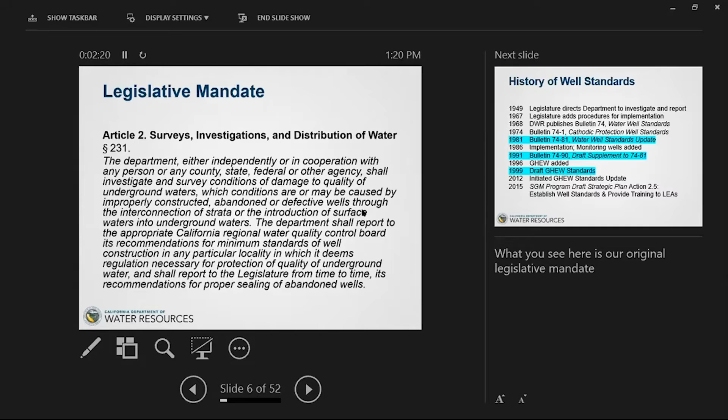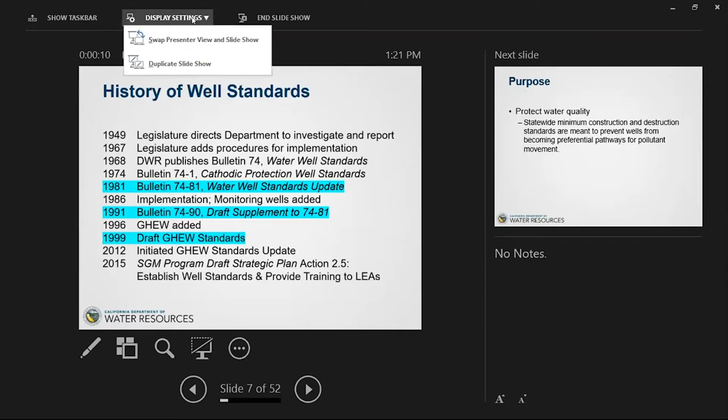Sorry, we're just working on technical stuff with the presentation. It's just showing your presentation notes instead of the slide. All right.

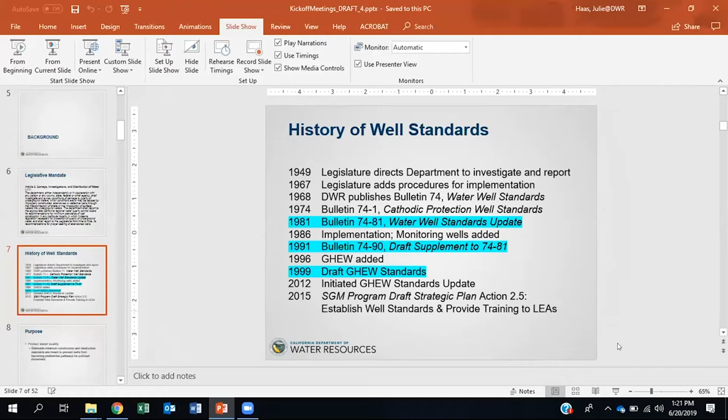Since 1949, the legislature has added several new sections to the code, adding more types of wells and detailing the process for implementing the standards. As highlighted in blue, the current well standards that are in use today were published in 1981, 1991, and the draft geothermal heat exchange well standards were published in 1999.

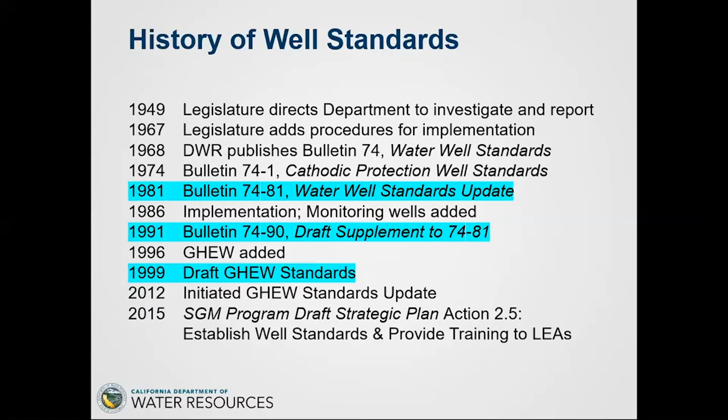Getting to our purpose: from our legislation, or from the water code, we get our purpose, which is simple: protect water quality. So statewide minimum construction and destruction standards are meant to prevent wells from becoming preferential pathways for pollutant movement.

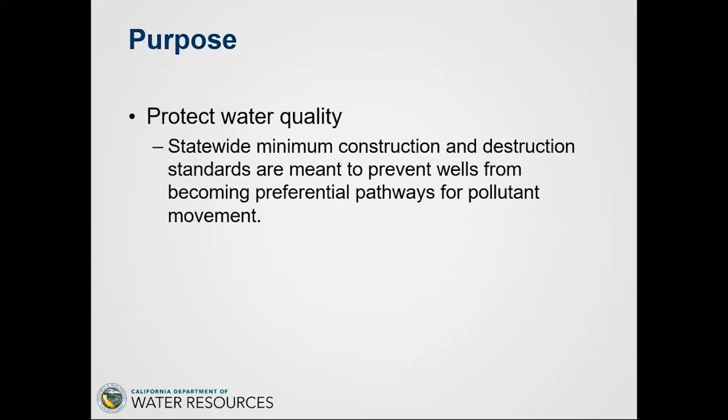And we also get our scope from the water code. The water code mandates minimum statewide standards for construction, maintenance, abandonment, and destruction of four types of wells. Those are water wells, monitoring wells, cathodic protection wells, and geothermal heat exchange wells.

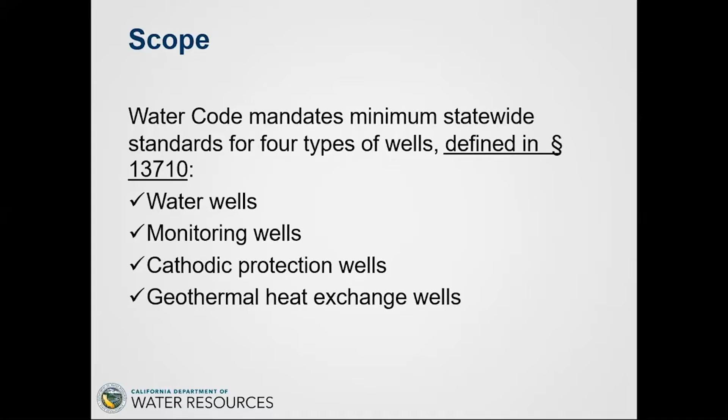The water code defines those four types of wells, and I'm not going to read them to you, but I'd like to point out that the devil is in the details, and in each definition there are nuances and exclusions that may surprise you, may not.

With water wells, in addition to extraction wells, it also includes water injection wells—meaning things like aquifer storage and recovery injection wells, or stormwater injection wells, which are sometimes called dry wells.

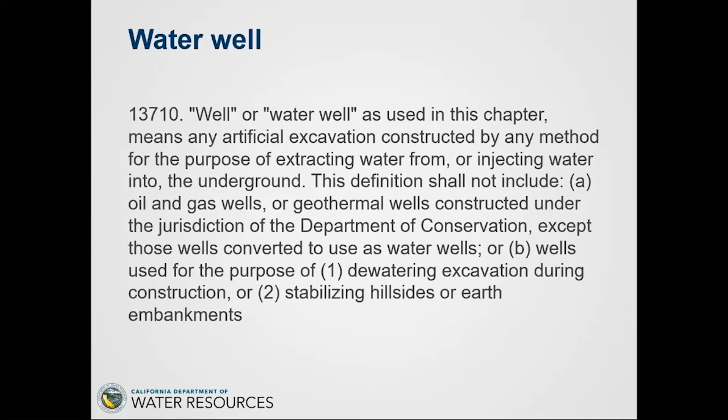And then there are some exclusions here with oil and gas wells, dewatering wells, and wells used for stabilizing hillsides. So for cathodic protection wells, the definition is provided: these wells protect underground infrastructure subject to corrosion with the use of a sacrificial anode.

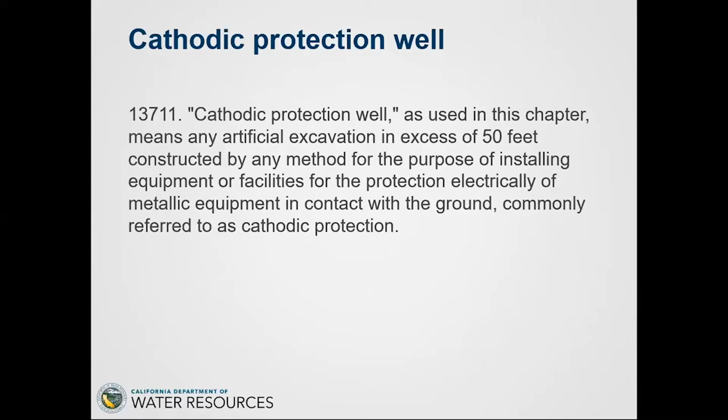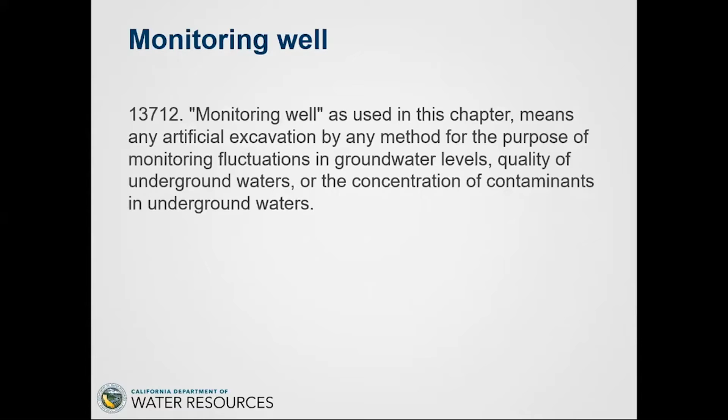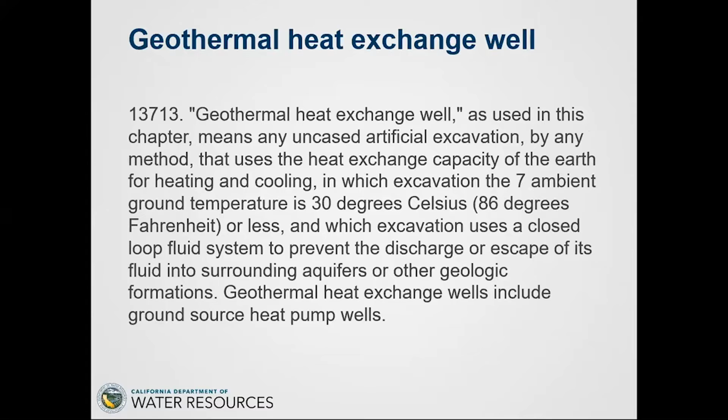And there's an exclusion you see in here. The standards only apply to those types of wells in excess of 50 feet deep. So for monitoring wells, as expected, they're for monitoring groundwater conditions, both level and quality. And geothermal heat exchange wells, these are wells used to heat and cool buildings by circulating fluid for heat exchange with the ground in a buried system of pipes. You'll see some temperature restrictions included in the definition there.

So I encourage you, if you're interested, to refer to the law, to read the definitions in the law, in the water code. We've summarized those in this California laws for the 4 types of wells. We have a pamphlet, and there is disclaimer language at the beginning that, if you want the official law, go to this link down below, leginfo.legislature.ca.gov. But this pamphlet, I'm pretty sure, is up to date. We last updated it in 2016 following the passage of the Sustainable Groundwater Management Act.

So in addition to defining our purpose and scope, the Water Code defines the process for implementing the standards. That is, taking them from recommended standards to enforceable regulations. So here's a brief summary of that process.

DWR develops those minimum recommended statewide standards. We submit them to the Water Resources Control Board. They then adopt them by reference through their model well ordinance. And then cities, counties, or water agencies, whatever is the local jurisdiction, adopts a local well ordinance that's at least as stringent as the statewide standard. Then local enforcing agencies, which are typically the County Department of Environmental Health, administer and enforce those standards.

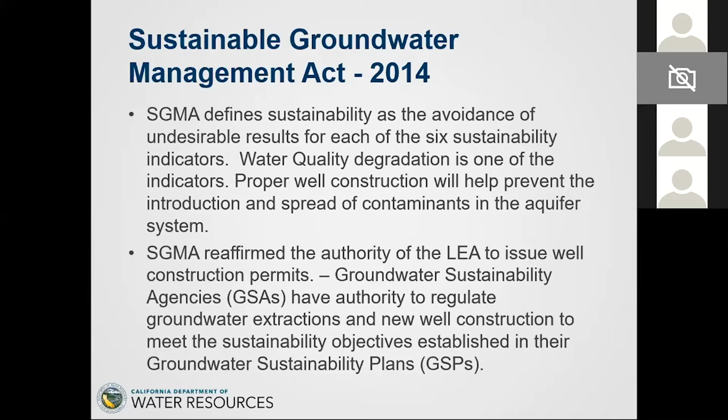And finally, SGMA and setbacks. So SGMA addresses well interference, so setbacks between wells, well spacing in relation to other wells, and stream depletion, so setbacks to streams. Historically, Bulletin 74, the well standards, have included minimum separation distances from potential sources of pollution.

So because of this nexus, we're going to coordinate closely with SGMO, that's our Sustainable Groundwater Management Office, on these related issues. And although these are considered out of scope for the well standards, we will reference any applicable guidelines at the time of publication.

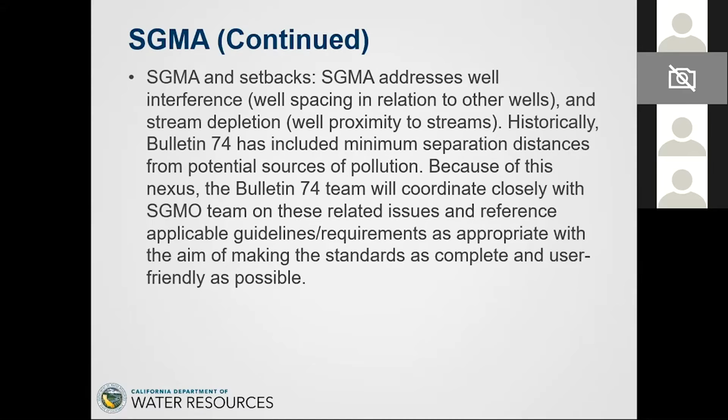Julie, I have one clarifying question. A participant is asking what LEA stands for. Can you just... Oh, thank you very much. LEA stands for Local Enforcing Agency. And typically those are County Department of Environmental Health, but they can be within a division within a water agency or water district, or within a city government. Thank you. Yeah, thanks for the question.

So I encourage you to keep our perspective in mind, that is DWR's perspective in mind, as you formulate your comments and recommendations for the update. We can only develop standards within our legislative authority, and that means we can only address standards as they relate to groundwater protection. We are updating standards for those 4 types of wells.

But we will also consider recommendations related to other wells because of this overarching mandate we have to investigate and survey conditions of damage to groundwater related to all wells. So finally, we are developing minimum statewide standards, so they won't address every scenario, and they are intended to be adaptive to a variety of conditions.

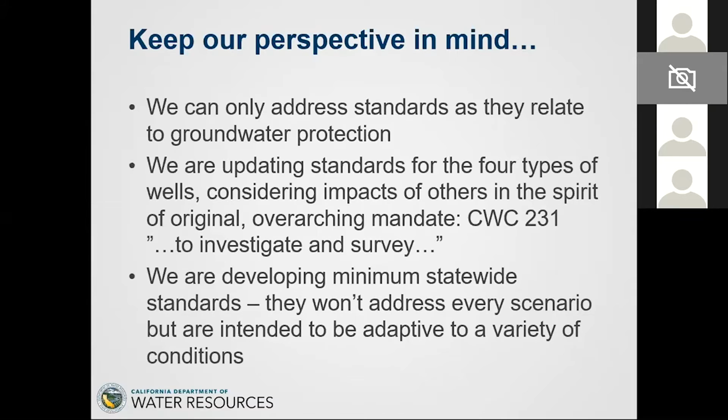So this is just something to keep in mind so that when you send us your comments, they'll have a higher likelihood that we'll be able to address them in the well standards if they relate to our scope and purpose. Okay, so I wanted to finish off this background section with a return to the importance of the well standards.

This figure is also a good segue to our next topic, which is the need for updated standards. I worked with our graphics office to update an old textbook figure that I stumbled upon on the Water Board's website from 1995.

I really like this figure since it shows exactly what we are tackling with the well standards. On the far left, you've got a public supply well that's pumping, and it's dominating the flow gradient in this image. You can see all these blue lines are flow path lines, pointing from the right to the left towards this public supply well.

In this image, we've got what geologists call layer cake geology, so it's idealized or simplified. You've got this upper aquifer and the lower aquifer, labeled on the far right.

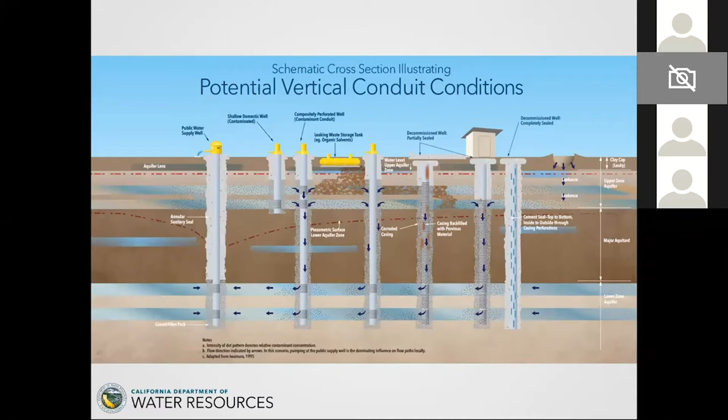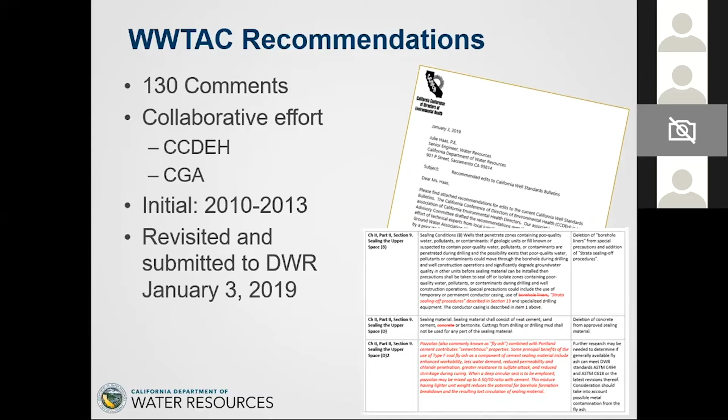Yes, I think they're referring to the CCDEH comments. We are working currently to post those on our website, or to find a way to post them. We recently have a requirement on our webpage to comply with state laws for accessibility, so we're trying to post them in a way that's accessible to everybody. Yes, definitely, we'd like them to be out there, and CCDEH and CGA have given us permission to post them. It's just figuring out how we can do that in a way that meets the new law. Wonderful, thank you.

Other low-hanging fruit are updated references to ASTM standards. Some of the ASTM standards we reference don't even exist anymore. And there are references to the California Department of Public Health, and all of those functions have been transferred to the Division of Drinking Water.

The no-brainers are things like making the standards consistent with other state requirements where appropriate. I have some examples here: the onsite wastewater treatment system standards include some setbacks, the American Water Works Association standards are required by the Division of Drinking Water for Public Supply Wells, so we would like to be consistent with those and with OSHA requirements for excavations.

I've also listed here under no-brainers, although it might be low-hanging fruit, recommendations that are outside of our scope. We talked about protecting groundwater quality and those 4 types of wells, so things that fall outside of that scope I've included here as a no-brainer.

Then there are items that need further technical review. A lot of these were flagged by CCDEH and CGA. I've listed some of them here - this is a partial list: separation distances, minimum seal dimensions, length and thickness, sealing materials and placement, vaults and pitless adapters, surface pad, concrete base, destruction standards and methods, length of screened interval specific to monitoring wells, conductive fill and concrete, slot size, drilled hole size, and watertight covers.

Those were specific to cathodic protection. So that gives you a flavor of those items that CCDEH and my project team identified as needing further technical review.

Needs further research is different from the technical review category - that's new engineering research, where we feel there are gaps in the current state of knowledge. For those, we're going to flag those items and we will likely prepare a white paper with recommendations to address those issues that we feel require engineering research.

As my team and I have gone through the CCDEH and CGA comments, we've made some observations about the current Bulletin 74 standards. Those standards appear to assume that conditions won't change—groundwater quality conditions today are assumed to be the same as conditions 50 or 100 years from now. They assume sealing materials perform equally well independent of soil moisture conditions. They contain ambiguous language, some based on intent, or words like 'adequate' that can be interpreted differently by different people. And they're based on past best practices and experience.

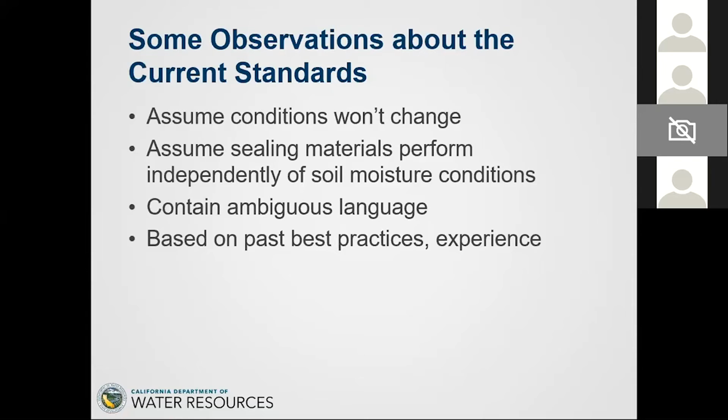I want to show you what a very basic well might look like that complies with our current standards, and where some vulnerabilities have been identified. Under the current standards, this well might have an operating life of 25 to 50 years. If there's no known pollution in the upper and lower aquifer at the time of construction, you can build the well with a continuous screen in both aquifers and a continuous gravel pack in the annulus connecting them—that is, if there's no known water quality concerns. It also shows here the 20 to 50 foot surface seal depending on the use of the well, and a 5 foot transition seal, typically with bentonite.

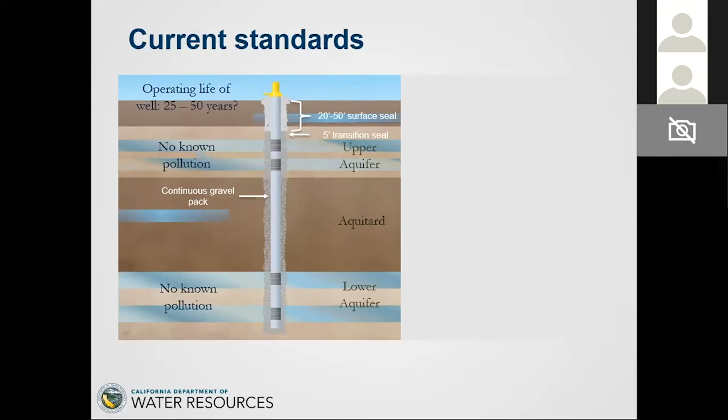Also under the current standards, when that well is eventually destroyed—and the lifespan of a destroyed well is forever—even though it's out of sight and out of mind, this infrastructure is still under the ground. If at the time of destruction there's still no concerns about groundwater contamination in these two aquifers, it's acceptable under the current standard to fill the casing with clean, pervious fill material, then cap it with an impervious material in the surface seal zone. You see the little mushroom cap buried beneath the soil at the top.

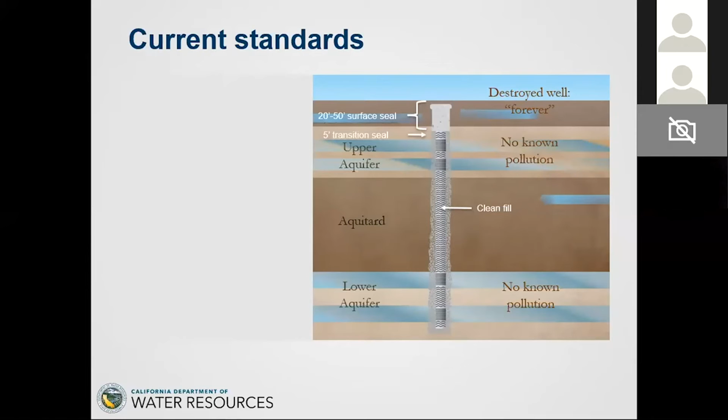So those are the current standards, and some of the vulnerabilities we've identified come from the Nebraska Grout study. First, that surface seal, sometimes called a sanitary seal—we have requirements for sealing materials in the standards, including bentonite-based and cement-based sealing materials. The Nebraska Grout study highlighted that some of these desiccate and crack in the unsaturated zone. In this graphic, my graphic artist drew a blue lens in the upper zone—maybe in this case it's staying moist enough not to crack, but typically there's a significant unsaturated zone in many areas, so we have concerns about that sealing material not performing as expected.

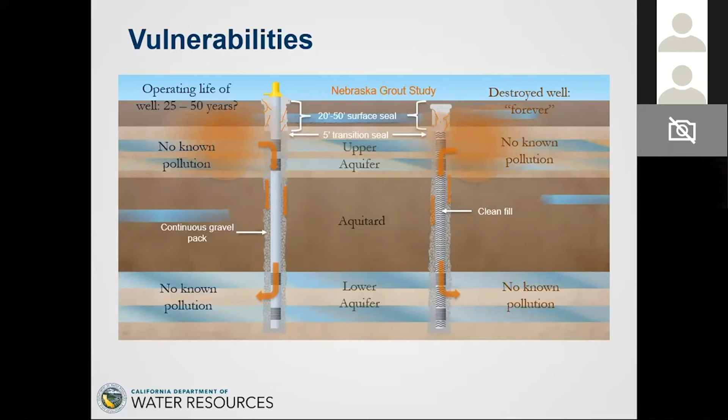We know conditions change. This upper aquifer might become contaminated over time, and the way this well is constructed, that contamination can easily move through the well itself or through the annular zone, through the gravel pack. Similarly, in a destroyed well, even using approved sealing materials, you might have desiccation and cracking in that upper surface seal. If conditions change, that well can become a conduit for those contaminants.

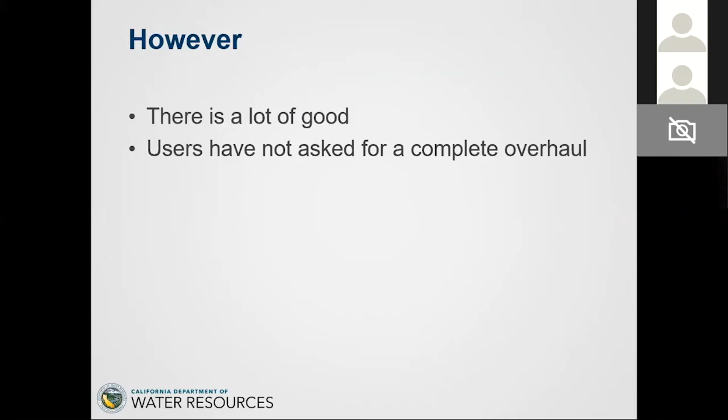That said, there is a lot of good in the current standards, and no one has asked us to completely overhaul them—I've actually had people say good things about them.

Building on recent activities—these date back before this current effort was initiated, since the last standards were published. The GHEW standards update began in 2012, when we initiated an update of the geothermal heat exchange well standards. That project was not completed; we worked on it until about 2015 and lost funding. I can't remember how many times we lost funding, but ultimately it was shelved at about 90% complete. That process is foundational to the current update.

At that time, we engaged key stakeholder groups such as CCDEH and CGA and industry experts. We established a stakeholder advisory group, which I view as a very successful stakeholder process. We met several times as a group and hashed through the complete draft text together. We all learned from each other—there were unexpected outcomes, and the standards were much improved from that process. We did identify some key issues and research gaps, and notably became familiar with the Nebraska Grout study.

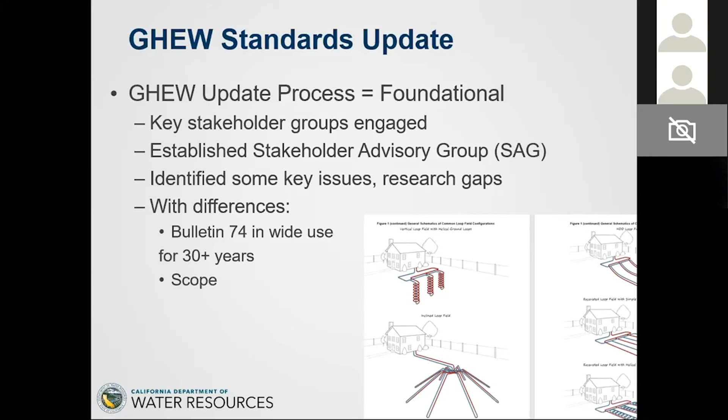The Nebraska Drought Study, as I mentioned, we became familiar with it through the GHEW process. It's a seminal study showing that many approved grouts in Bulletin 74 were desiccating in the unsaturated zone. So in about 2015, maybe 2016, without funding in sight for updating the well standards, we published a statewide sealing advisory.

It's on our website if you want to look that up. The statewide sealing advisory reflects some of the findings of the Nebraska Drought Study, and it was actually reviewed and approved by the Nebraska Drought Task Force members who were serving on our SAG.

UC Davis Literature Review. In 2016, we received an offer for funding that could only be used to hire a contractor to do research. It couldn't be used for internal staff, for instance, to update the standards. So we recognized that at some point we would be updating Bulletin 74, and we needed to know more information about the issues raised by the Nebraska Drought Study.

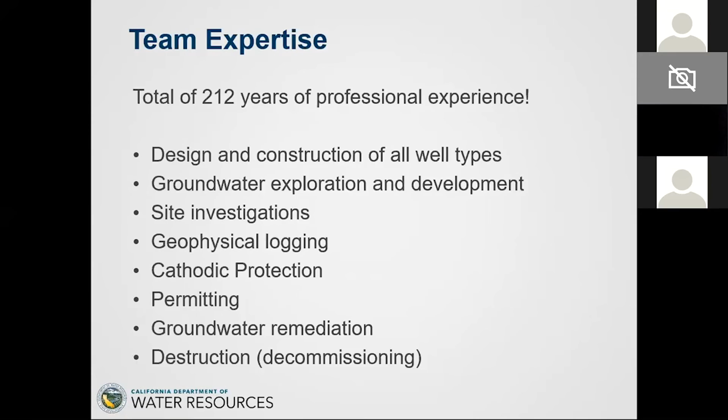Project team activities to date: our project team has been working on reviewing the CCDEH and CGA comments, and then taking those items I identified as needing further technical review and doing desktop research on those items. We're working on developing some tech memos, and all of that will feed into content development for the updated draft standards. We've done some capacity building, like site visits and brown bags, and we'll continue to do so, and outreach.

I wanted to highlight some of our outreach efforts. We have a commitment to robust outreach and engagement. We want to share information and education with our stakeholders, and we're holding these kickoff webinars today to let you know how to participate and engage with you more. We've been attending professional conferences and giving presentations. We have a new email service, perhaps some of you have signed up for it already. It was included in the announcement for this webinar, and there's also a link on our website. That's a listserv or distribution list you can sign up for to get announcements. We updated our web page.

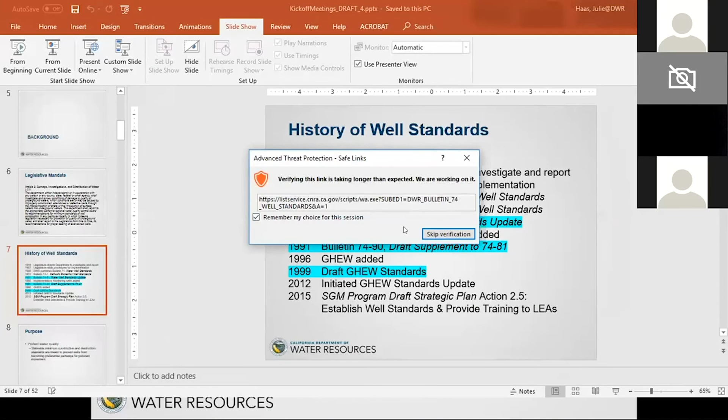There's one question online. One of your bullets mentions a new email service for announcements and updates. That's not a specific address, is it? It's a listserv that folks can sign up for? It is, and I think this is a live link. Should I click on that? Yeah, go ahead. Listserv email window. Hopefully we won't foul things up here.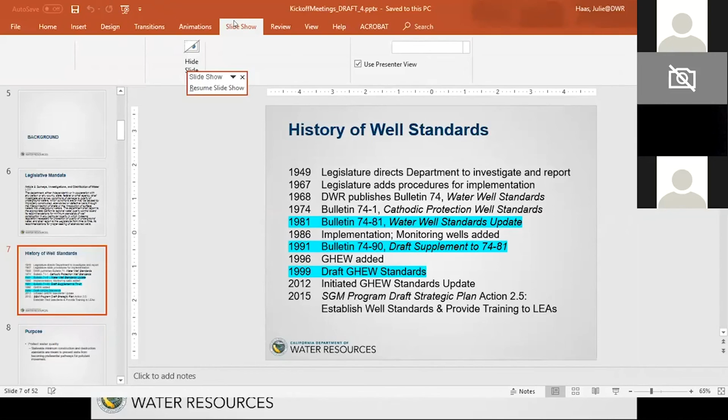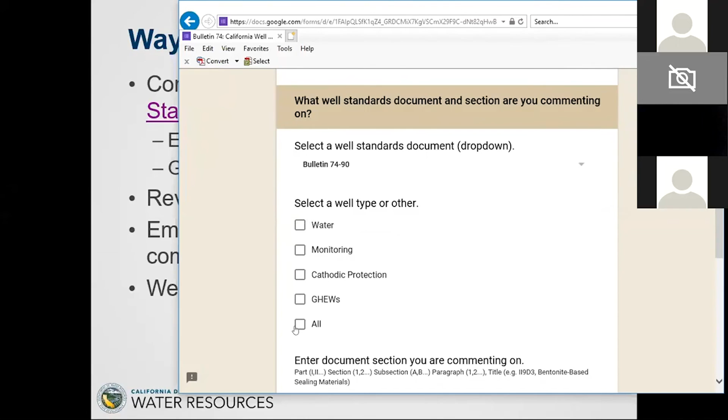So just to give you a flavor of it. What well standards document and section are you commenting on? You could say Bulletin 74-90, select a type of well or all wells, enter a document section. We'd really appreciate it if you could provide as much information here, the easier it will be for us to address your comment.

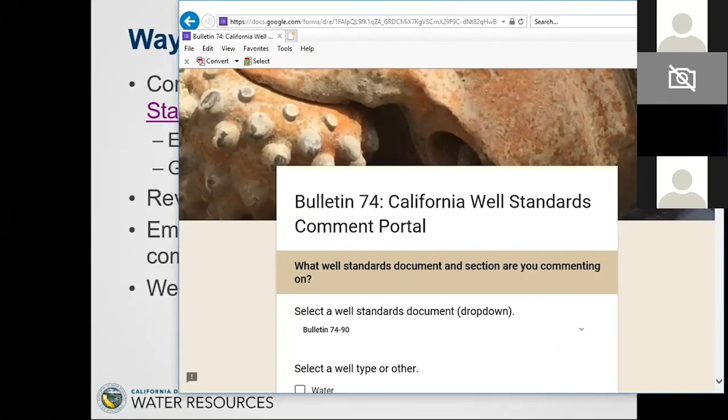And Julie, is there a deadline for these comments, or will it be open? It's open. But we would like the sooner the better for us, because then they'll have more time to look into the comments and address them. One question a user had is, will that link to the comment portal be posted to the Bulletin Standards website? Yes, it is.

I also have this, review the CCDEH CGA comments. Somebody asked about that earlier. We're hoping to post those on our website or get them out to you, so we're not reinventing the wheel. If you look at their comments and agree with what they say, you can let us know. I think it will be of interest to a lot of you to see what they've put together. They put a lot of thought and time into it, and they have a lot of expertise behind those comments.

So if you don't want to use the portal, just contact us and ask for other ways to send comments. You're welcome to email us comments, call us and talk to us, send us hard copies. But we hope that you use the portal because it'll make it more efficient for us to address your comments that way.